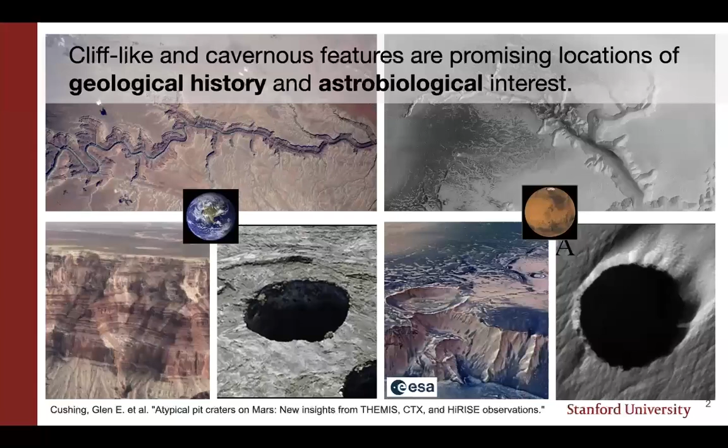In particular, these are lava tubes. It's hypothesized that if we want to see signs of past life, inside a lava tube might be a very good place to do it. They're relatively shielded from radiation, shielded from extremes in temperature, and better at preserving the remains of life.

Also, it's been pointed out that—yeah, this has been happening. I think it will come back on again in a sec. I'm not sure why.

There we go. If we will eventually have any human habitation, inside a lava tube is a great place to try to do it. Once again, because you're relatively shielded from radiation, you have a more stable thermal environment. So if you erect a structure, inside a lava tube is a place of great interest.

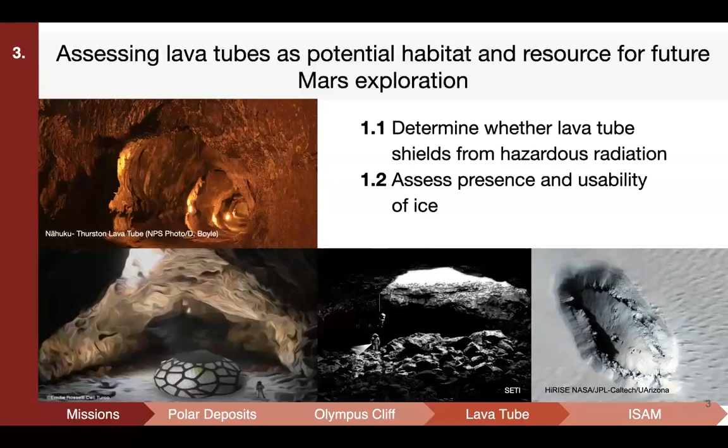Okay, so that's the motivation. Now, the problem with lava tubes is that they look like this—this is one in the Mojave Desert. We don't know for sure whether the lava tubes on Mars have the same kind of very rough, rocky terrain, but we suspect they do.

And then the question is, well, before any kind of people go into these places, we're going to need robots to explore them, to set up a bit of infrastructure. What kind of robot is suitable for this terrain?

The Ingenuity flyer on Mars was amazing, amazing what it can do, but flying inside a lava tube is another matter. Also, especially in that incredibly thin atmosphere, you can't apply any force, so it's hard to do any work.

Legged locomotion in this kind of terrain is difficult for people, and I think also for ANYmal and other quadrupeds. And not only that, but you don't just want to clamber over the ground—you want to be able to look at the walls and ceiling, because that's where it's likely that you're going to find some interesting chemicals and evidence of past life.

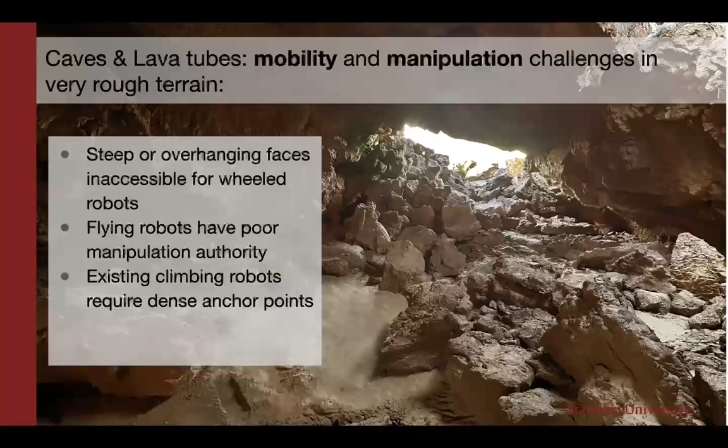So there have been climbing robots worked on at JPL by some of my former students. This is one with Aaron Parness called Lemur. This is Lemur 3, I think, using microspines to climb a cliff face.

The problem is that if you have a robot of reasonable size that you could fly up to the moon or to Mars, it isn't all that big. So the world becomes full of very large obstacles that you have to navigate around and clamber over. One way to work better in rough terrain is to make the whole robot bigger—the bigger you are, the smaller the obstacles seem. Unfortunately, it doesn't scale well with payload. Your weight grows rapidly, and the whole cost of the mission becomes large.

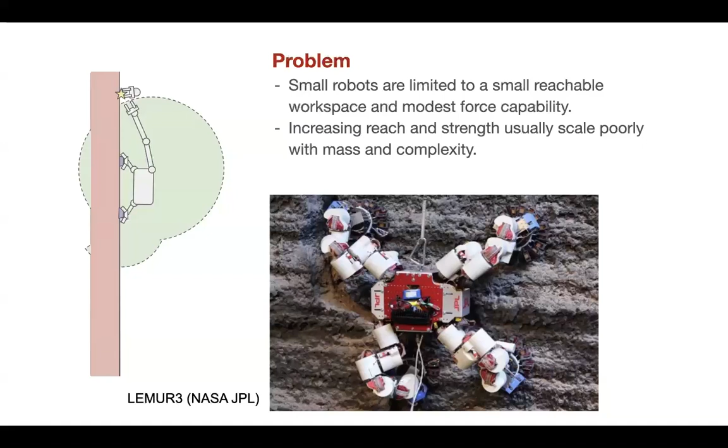So our idea was, what if you could have a small robot, something the size of a carry-on luggage suitcase, but with really long reach? Imagine a suitcase-sized robot where I could reach up to that projector up there.

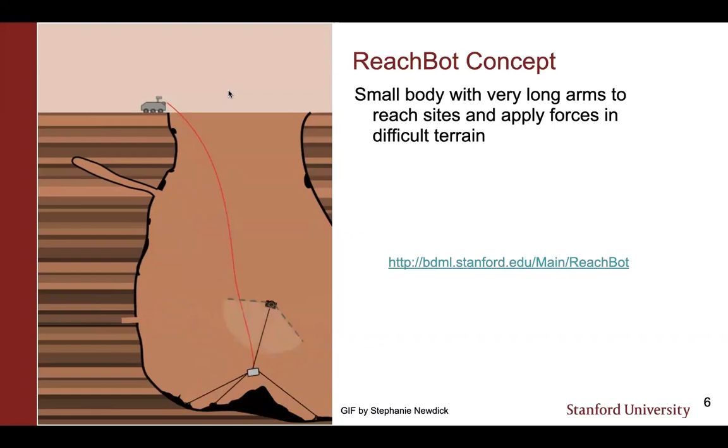The best concept, the best illustration of the idea, is from this GIF by Stephanie Newdick. So I'll just play it, and you get the idea right away. Now it's making its way down to the lava tube floor, which, remember, is very rough. And I think it concludes by taking a selfie. Yes, there we go. So that is the basic idea.

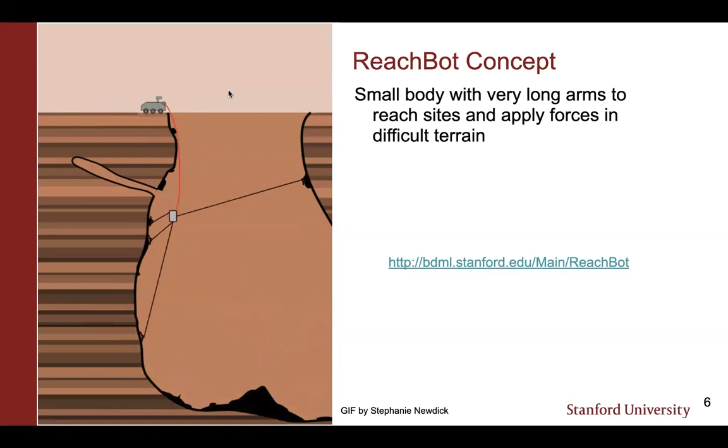I'm a bioinspired robot guy, so this presents a bit of a paradox. I like to think about bioinspired design, but why should bioinspired design be at all useful for space robots? There are, as far as we know, no biological creatures in space, so why would anything they've acquired from evolution on Earth be relevant? Good point. Nonetheless, it's hard not to think about it.

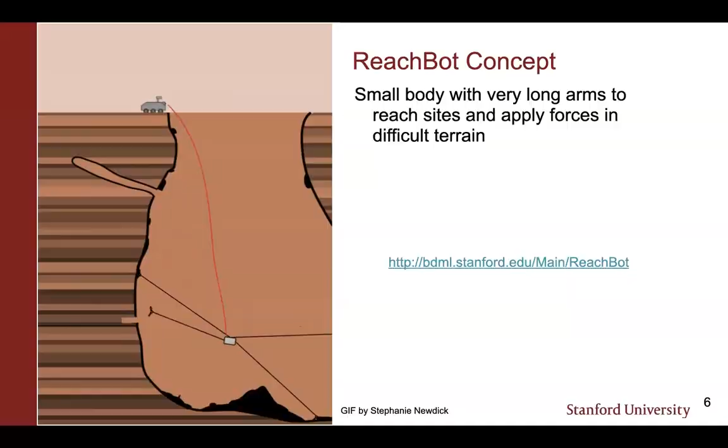The idea of having a small robot with very long limbs—the first place you might ask is, are there in fact creatures on Earth like this? So there are these insects, the harvestmen, where you have a very small body and very long limbs. This allows them to work very well in extremely complex, three-dimensional terrain.

But as you think about it, these are all very small on Earth, and the limbs are really not strong—they're not able to apply large forces. It doesn't seem to scale well. We don't have anything with this morphology at the kind of scale that I'm talking about.

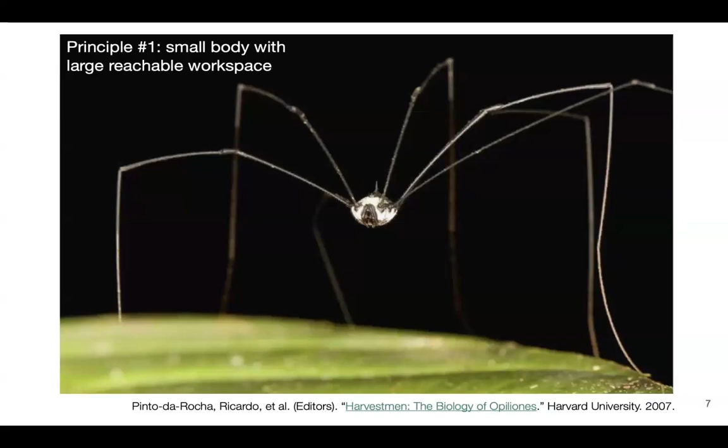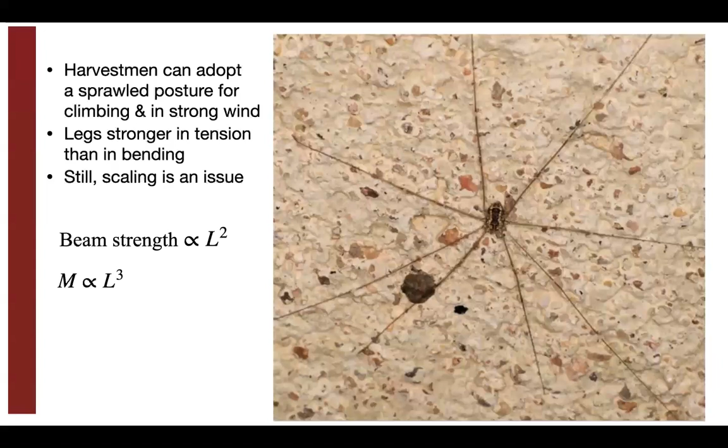So think about that. The other point is that the limbs in bending are not strong. However, it's interesting—what these insects actually do is, if there's going to be a thunderstorm, they spread out. These limbs are much stronger in tension than in bending, so they do this spread-eagled posture and are able to ride out the storm. But it doesn't scale well—beam strength goes as length squared, mass goes as length cubed, and that presents some problems.

Then again, if gravity is not an issue, maybe you could scale to the kind of scale we're talking about. So this is the Japanese spider crab, actually getting to be about the size of the ReachBot prototype that we built. But also notice—because I'll come back to this later—what's at the end of the limb there? You see the gripper, yeah.

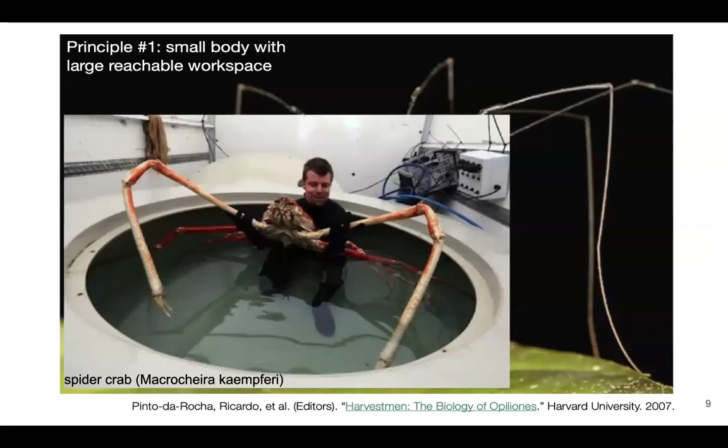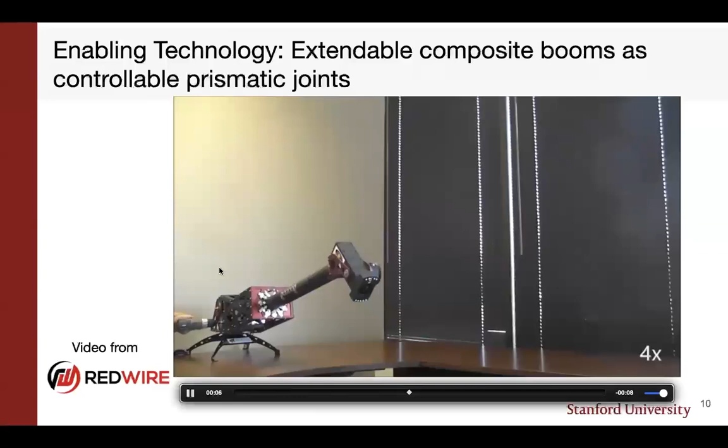So I could make jointed limbs, but it gets kind of long and complicated—we're talking about a robot with many degrees of freedom. If I say, look, what I really want is a very long reach, what's the simplest possible structure I could use to do that? There I can take advantage of these unrolling boom structures that are used for antennas and solar sails and things like that in space.

This is a carbon fiber boom. You can imagine it's like a tape measure—it rolls up and you extend it out. There are different kinds with different weight and strength ratios, but that's what we're using to make the limbs.

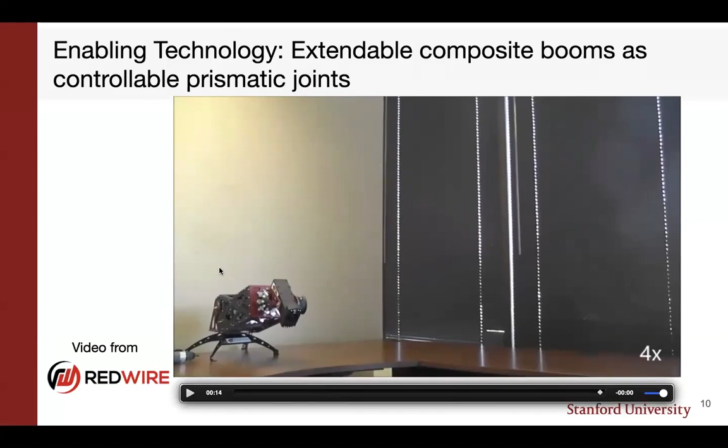Part of what attracted me to this whole concept at the beginning is that it allows me to bring back grasping, which is something I've been interested in for 35 years. If you have a small robot with multiple long limbs, you basically turn locomotion into a grasping problem. There's a whole big long body of theory about grasping.

You have multiple fingers, each one is a serial chain. Together they work in parallel. They apply forces to a body. You can talk about metrics of grasp stability. You can use it for control.

And remember what's interesting about these fingers is that they can push upon the object, but they can't pull. So there's an interesting unilateral force constraint.

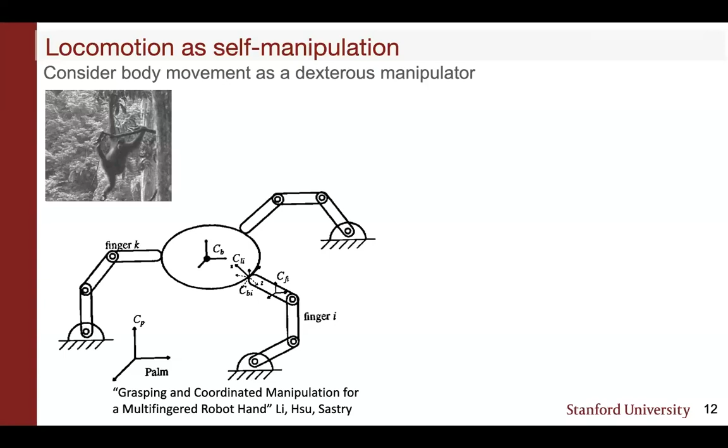We have basically the same kind of thing, only now, because these booms are very long, they can apply much more force in tension than they can in compression or bending. So to a first approximation, we have sort of inverse fingers that can pull but not push, and a lot of the mathematics of grasping carries right over.

What we really have is that at each of these booms, it has one long prismatic degree of freedom, then it has 2 rotary degrees of freedom at the base, and then 3 passive degrees of freedom out at the tip.

And the one part that's a bit different is the constraints at the end. In grasp theory, we talk about how fingers push upon an object, but the force you apply is subject to the constraint of Coulomb friction. So the force vector should be inside the friction cone. Here, the contact constraints are somewhat different, and I'm going to spend the next few slides going into that in a little more detail.

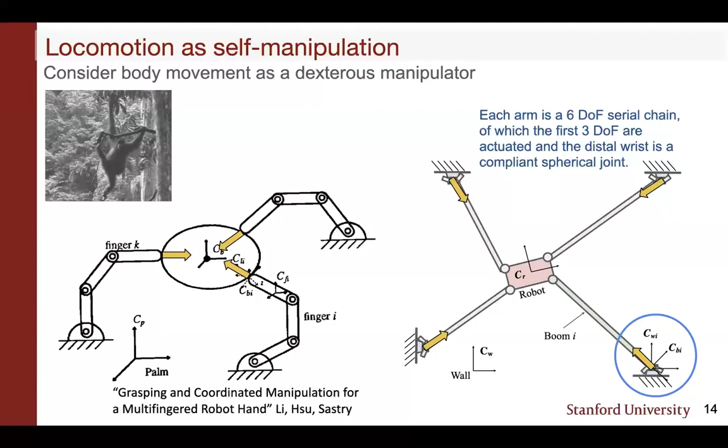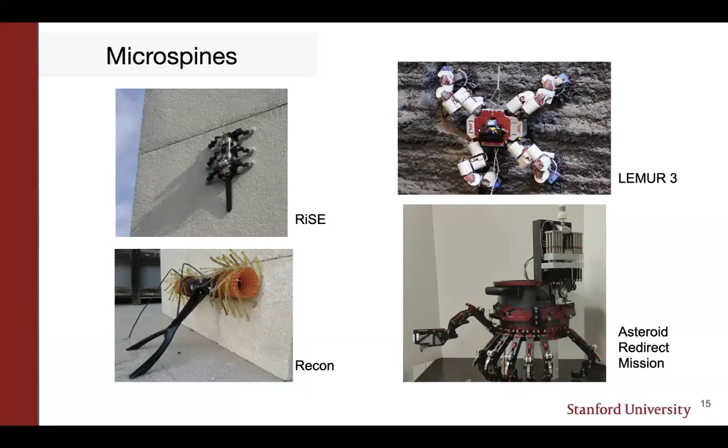For grasping rock, our solution, of course, is to use microspines. We love microspines, we've used them for over 20 years. We've used them with Boston Dynamics on the RiSE robot, we use them with JPL on Lemur, and so on. So I need to give you a quick crash course on spines.

The spines are literally sharp little things, we've used various materials. We've used suture needles, we've used various kinds. Actually our favorite thing nowadays is to use Japanese microfish hooks. I think it's wonderful that Japan, the country that has bonsai, also has a hobby of microfishing, and they make really good microfish hooks. So we clip those and put them into our spine suspensions, and each spine, if you looked at it with a microscope, has about a 10 micrometer tip radius.

It interacts with the rock surface, and depending upon how rough the surface is, you have a certain probability of finding what we call an asperity, which is a little bump or a pit within a certain unit of area.

Having latched onto an asperity, how much force I can apply and in what direction is a function of the local angle of inclination, my approach direction, and the local coefficient of friction. So if I have some probability distribution describing the surface roughness and how many features there are of a certain angle per unit area, I can make a probabilistic prediction about forces that spine can apply, but it is stochastic.

And then if I have many spines, I can add that up, only if I assume the spines are independent. We'll come back to that later, because that leads to a whole problem of spine suspension design: when you have 5 spines, do you really get something approaching 5 times more force than just 1 spine? It's a big practical design consideration.

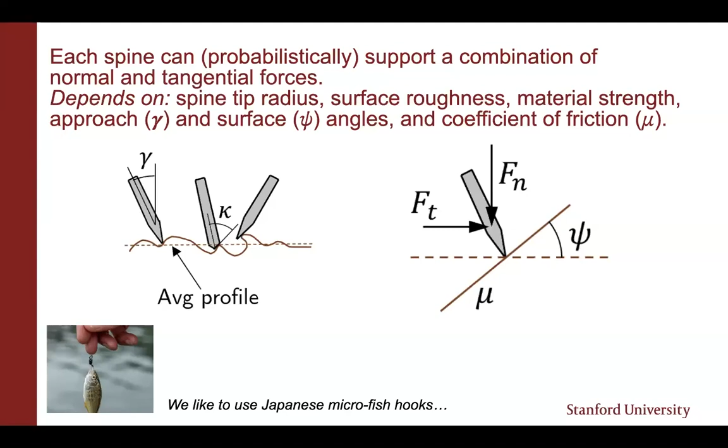So spine theory, up on the left, the models actually work very well. They're able to predict mean spine forces very well, but it is stochastic, there's a fair amount of inherent variability. It's like saying there's a 70% chance that it will rain tomorrow. And we use that to think about the grasp.

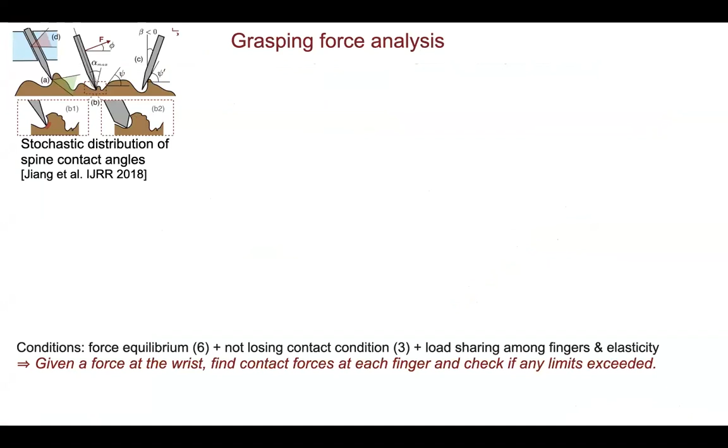So we have a gripper in the current version of RISE. It's a 3-fingered gripper. It doesn't have to be 3, but 3 actually works pretty well. And what I'm doing is solving for the quality of the grasp.

So I have force equilibrium equations. I have, in addition, it's a little bit conservative, but I also want to be sure that when I pull on the gripper, all the fingers remain in contact, that one of them doesn't pop off. It actually could possibly still hold with 2, but then I have less stability. So we enforce that constraint as well. And then I want to have load sharing among the fingers.

And if I do that, I get a set of equations that I can solve such that given some force applied to my compliant wrist, I can predict what the force will be at each finger, and then I can ask whether the force at each finger should be sustained by the collection of spines on that finger. Does that make sense? So we're almost done with grasp theory here. I'm just going to stop and take any questions before moving on.

Question: the arrangements of how the spines on each individual finger? Yeah, I will talk about that a little bit in the next couple of slides. How many spines and where they should be. Yeah.

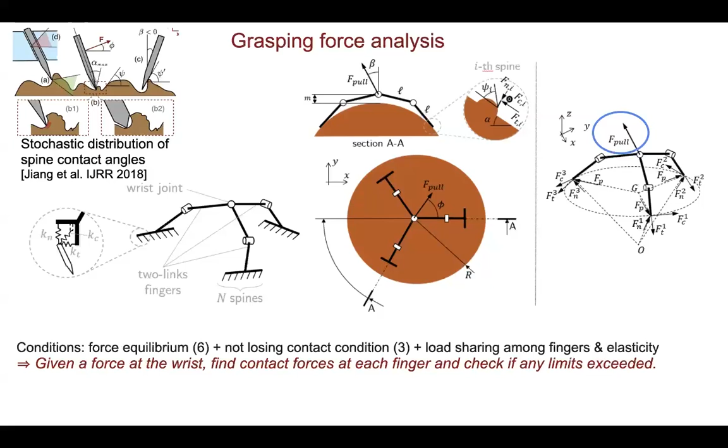Take one, okay. So we apply a pull force. What we're eventually going to do is build the analog - remember, with grasping, forces have to be within the Coulomb friction cone. I need to build an analog to that. It's called a limit surface. In general it could have up to 6 degrees of freedom. It's a convex surface, and the way we do it is like this.

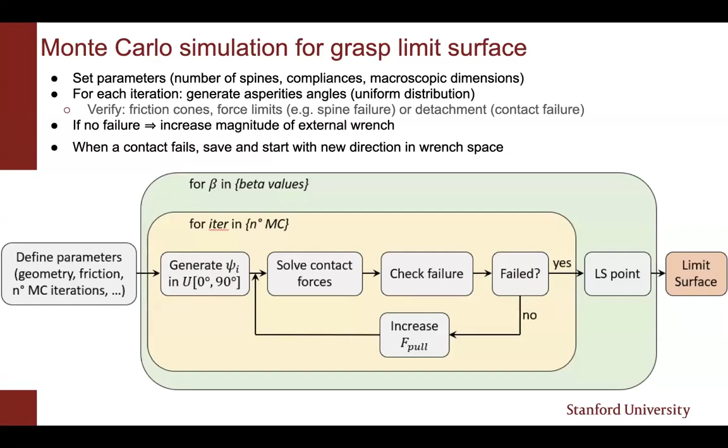We assume a grasp, and then we apply forces at the wrist. We solve the grasp equations, get the forces at each finger, and check whether all the fingers have forces that they, in theory, can sustain. If they can, we increase the force a little more until one of them can't. As soon as I get a failure, I record 1 point. We do that as a Monte Carlo simulation, and thereby gradually build up a limit surface.

Because I've assumed a compliant wrist with no torques, if I embed a coordinate system there, I can plot a 3-dimensional limit surface, with forces in X, Y and Z. It's a convex surface, and if you take a cross section of it, it looks like what we see on the left here. Remember, it was stochastic, so I have my predicted mean, which is in blue, and then 1 standard deviation in red. The idea is that if I apply a force, I want that force to be inside this limit surface.

If it is, then in theory I should be able to sustain that grasp. I'm going to use that information for planning later, and if I'm conservative, maybe I'll use the lower red boundary. You might be asking, what are these funny flat faces here on the sides, which you can see as flat facets? Remember I said earlier that I was imposing the constraint that when I pull, none of the fingers should pop off and leave me with just two. So that's what makes those facets. Does that make sense?

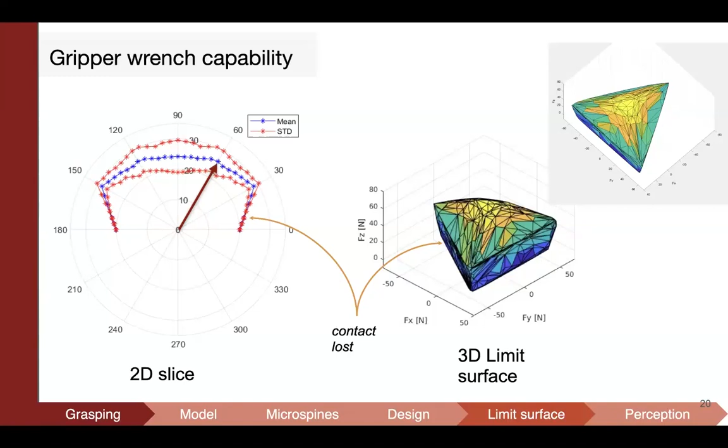So we build this limit surface, and it already begins to tell us some things. We're going to use it for motion planning, for grasp planning. It also gives us some insights into gripper design.

Well, there's another cross-section that I've plotted. As you can see, not too surprisingly, if I increase my internal grasp force on the gripper, then my maximum pull force increases almost essentially linearly.

Well, suppose I want to sustain a large force, and I really, with my gripper, because I'm very much weight limited, I have this long arm that I'm putting all the way out. I'd like the gripper to be very lightweight, as low inertia as possible, and therefore I'm going to use small motors and so on. So suppose I can't actually afford to exert 12 newtons worth of internal grasp force, and yet I still want a really strong grasp. What could I do?

Well, more spines. Remember, if I have enough spines, I can hang my own weight from it, provided I maintain independence. And in fact, with our current spine suspension, what you see is this: as I go from, on one finger, from say 10 to 20 spines, I'm getting a substantial increase in my pull force. As I go to a higher number of spines, I start getting diminishing returns. In fact, 50 is really not much better than 40. And that's because it's actually pretty hard to have increasing numbers of spines and still have them all be completely independent of each other.

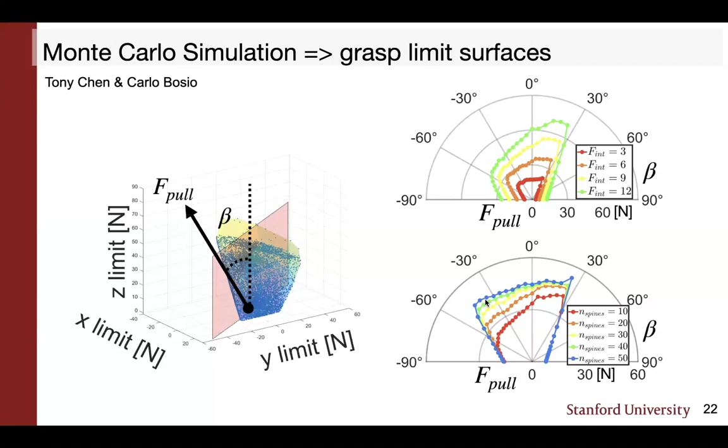A couple of other things that you learn. One is, it really helps. This is very different from when we were doing climbing walls. Here we have the option to look for features that we think are kind of graspable. And that makes, again, a big difference.

So this angle alpha essentially is related to how much I'm able to enclose a part of the surface. The worst case, which is a flat wall, is this light blue line down at the bottom. What I'm plotting here is the ratio of pull force, maximum load force that I can apply, to my internal grasp force. As you can see, as I increase the grasp force, the pull force just increases directly, I don't get very much extra. On the other hand, if I'm able to get to wrap around surfaces a little bit, I can get much, much larger ratios of pull force. Although again, eventually it doesn't help anymore.

So if I can wrap my fingers partly around a knob-shaped object, that helps a great deal. But if I am to the point where they're just opposed to each other, it isn't really much better, which again kind of makes sense intuitively.

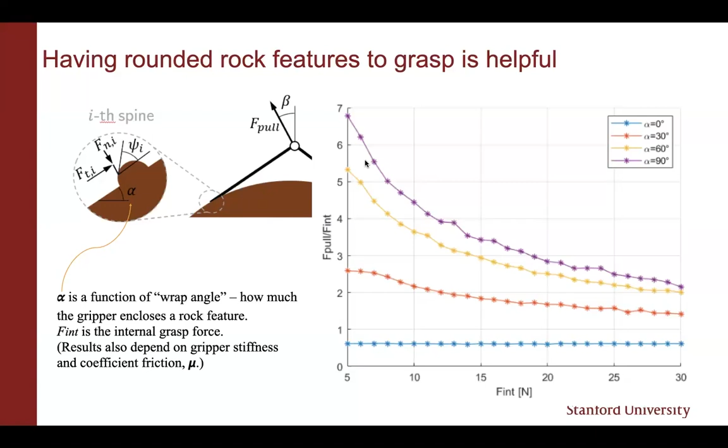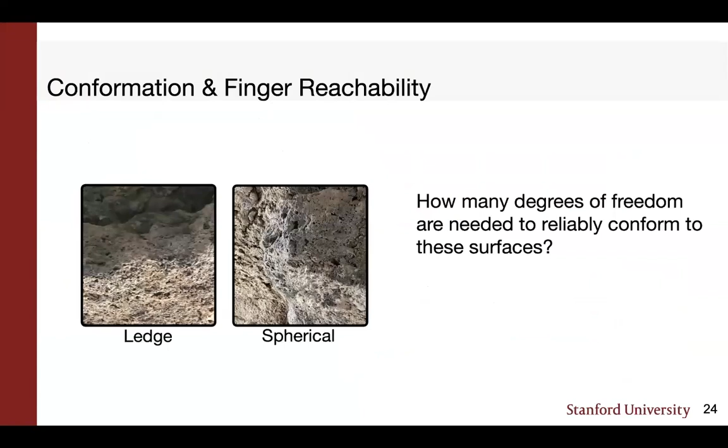And finally, if I'm going to wrap around these features, what kind of finger design should I have? How many phalanges should my fingers have? How many degrees of freedom should they have? This is a problem of conformation.

So what we're trying to do is conform to the surface at multiple length scales. At the microspine level, I want to make sure that all of my microspines, even on a very rough surface, are still able to reach the surface and find asperities and sustain some load. I want the finger to conform to the surface at its length scale, and then I want the whole gripper to be able to conform to surfaces.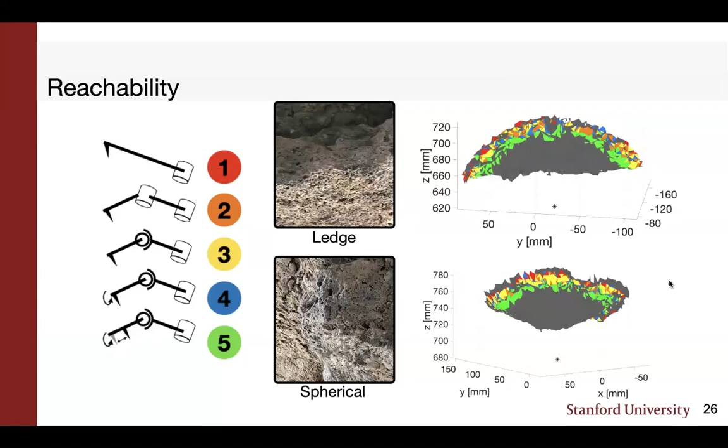So here's the gripper, and this is especially Tony Chen's design. It is an under-actuated gripper. It is just meant to grasp, it doesn't manipulate. I assume it will come back in a minute.

There we go. It's a 3-fingered gripper. Everything is driven by one tiny motor and a huge gear ratio. Honestly, I kind of think in retrospect that Tony could have afforded a slightly bigger motor, but what it mostly does is it makes the hand very slow to close. There are tendons routed through these fingers, and a differential that does load sharing between the fingers. And then here are the spine tiles, and I'll say a little bit more about them in the next slide or so.

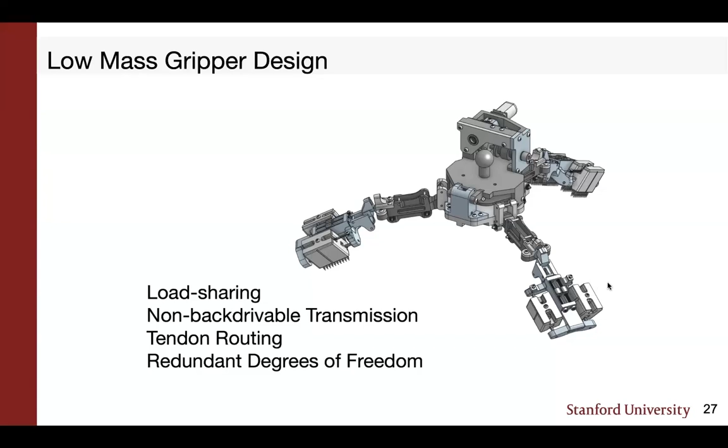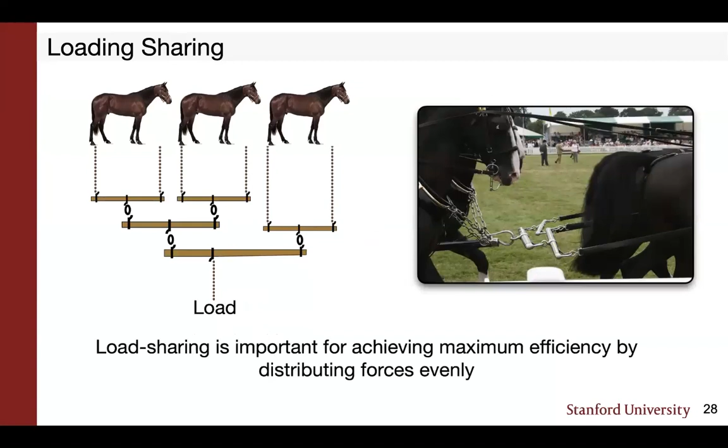So one way to do load sharing is to use a differential. It's a very old idea going back to Roman, maybe even pre-Roman times. If you have several horses or oxen pulling a heavy load, you don't want the one that gets a little bit ahead of the others to wind up taking all the force. So you set up one of these kind of differentials, and we do that too.

So here is the design, and I'll spend just a moment or two going through some of the features here. It's a busy slide. The differential is up in the upper right corner here. So the motor is pulling on that and loading the 3 fingers through the differential. The spines down at the tip, these are what we call the linear spine array.

So there's a bit of history there. When we started working on spines and understood the need that every spine should be able to load independently of its neighbors, we actually made a compliant 2-material suspension for every spine. When you look at things like the Rise robot or early stuff, that works, it's actually great, but it leads to a kind of large apparatus. The one where there's a photograph of me hanging on a wall, the spine array is as large as a tennis racket. What we discovered is that if we do spines that slide linearly, we can get a much denser array. They do not do load sharing as well, but they more than make up for it in terms of higher spine density. So if I want to do kilograms, tens of kilograms, or maybe hundreds of kilograms, we mostly have been using these linear spine arrays now.

And then we have tendon routing with compliance. You were asking about compliance, Robert. Yes, there's compliance everywhere in this system, because what I want the hand to do is that if I just push it at the end of my long boom, which is extending, it should just adapt to whatever that surface is in a compliant way, and then I tighten the motor to get a good grip. And that's how it works.

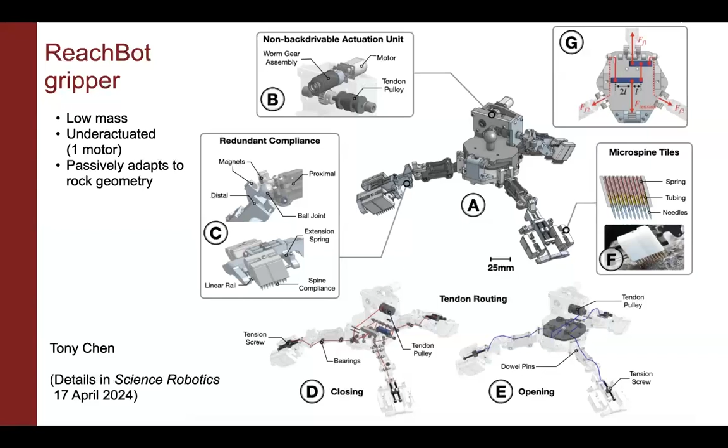I want to move on now and talk about a couple other parts of the problem. This is Julia's work especially. There's an interesting perception problem. In contrast to what we did with earlier climbing robots, like the Rise robot, where I'm just climbing a more or less featureless wall, here I'm relying on finding features in my vicinity that look like they would be good to hold on to, like that cornice up there.

So there's a kind of two-stage perception problem. One is before you send an arm out, you're looking around with cameras on the body to see if you can identify crevices or knobs that look like they would be good to hold on to. Then as you extend the arm out and get within a meter from the surface, now we can look at it in much more detail, see if it's really as rough as I was hoping it was, and if there's really a good place to find on the local surface.

So she's using nothing special here, it's an Intel RealSense camera and time of flight also, identifying spaces where we think there's interesting curvature at the length scale of the gripper in order to take a grasp. And remember, from a few slides ago, I showed that plot of wrap angle versus pull versus internal force. That's what I'm looking for—I'm looking for things where I think I'm going to be up here in this regime and not down here.

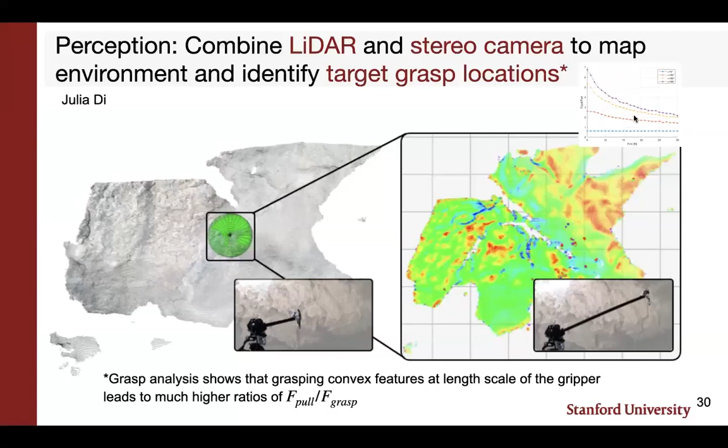As you get closer, of course, you can see a lot more. That's a great graspable feature there. Use that to do your final grasp planning.

So it was spring of 2023. Tony, Julia, and Stephanie took a field trip to the Mojave Desert. The geologists told us that that was probably the best analog on Earth for the kind of lava tubes that we would hope eventually to explore on Mars.

And we didn't have a full-on ReachBot robot at that time. We had one arm on a tripod. I'll show a little bit of the video. This video, I think, is included as part of the media for the Science Robotics paper that describes this work. As you can see, it's not fast.

And we find a grasp, and then the gripper very slowly closes and tightens. So we did targeting practice, we did pull force tests, and so on.

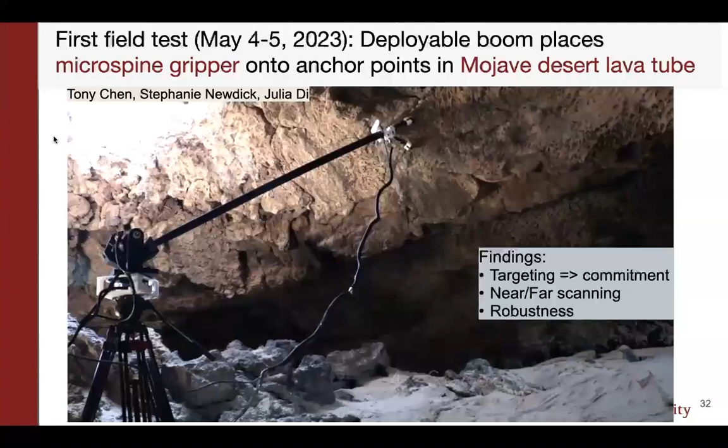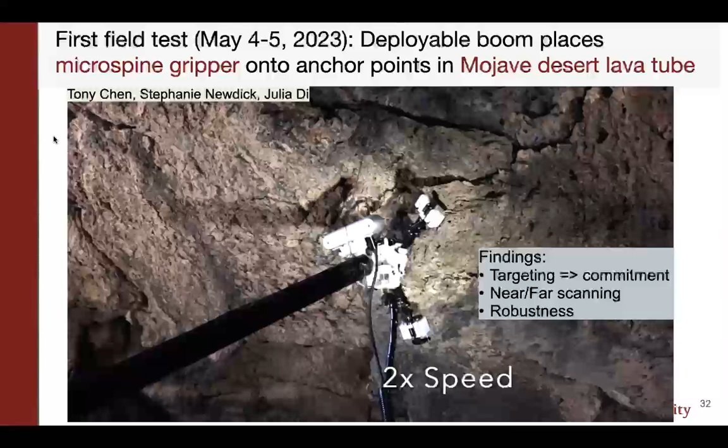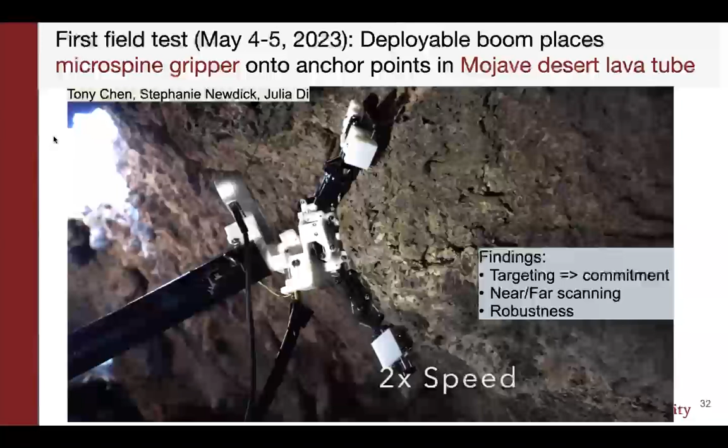And actually, we learned something from this. Even if things get faster, grasping at the end of a long boom is really pretty different from a robot grasping things on a tabletop. There's a level of commitment involved. It's not as severe as it would be for a drone perching, where you fly and you try to find a good perching spot, and either you land and grasp, or else you fall and you have to very hastily try to recover before you hit the ground and crash.

You don't have that, but it takes a while to load these arms all the way out, and then you don't have very good targeting. In fact, we have to use endpoint sensing. We don't have very good control at the end of that very long arm. And so at that point, I've made a certain commitment that I really think that there ought to be something good to grasp out there.

As I mentioned, we have both near and far scanning. And then, yeah, robustness, of course, is always an issue whenever you're doing anything in the field.

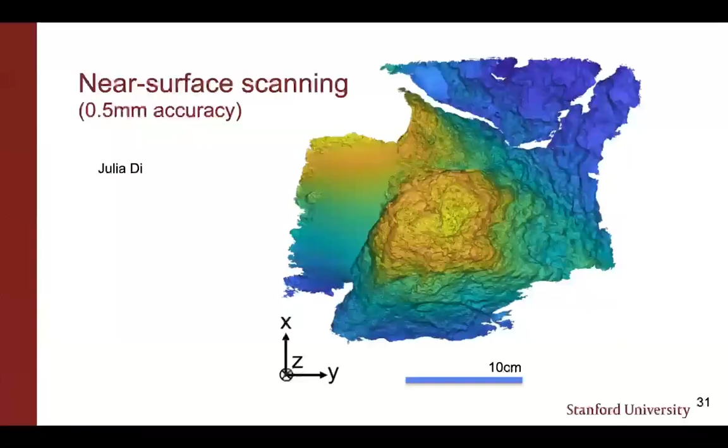The one hanging down from the camera, or the very thin one going upward? Gravity compensation, because this thing's, Martian gravity is less than Earth. Yeah, so it's gravity offload.

I think say that for a rock climbing competition in such a case, would it make sense for me to try? You would give this to the professional rock climber, give them finger caps with these needle surfaces. What would they be able to excel with? It's funny, we did talk to some rock climbers. I mean, it is of use, because you can grasp with spines much faster than you can insert screws or things like that. So from that point of view, it should be good. And you can apply really large forces if the rock quality is good.

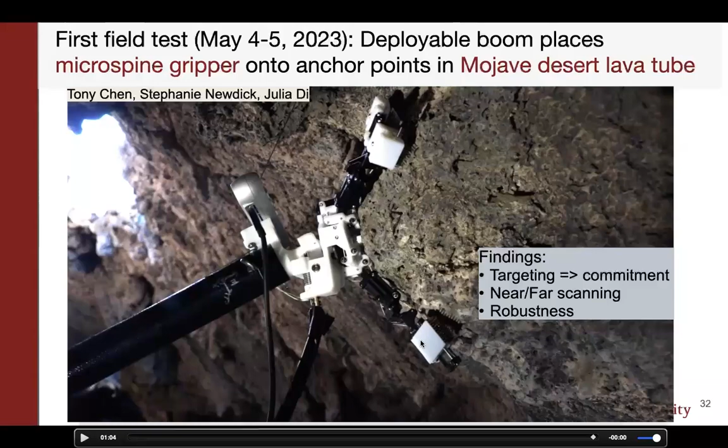So there's the concept. Now I want to talk a little bit about some of the planning work of Marco's students, in particular Stephanie. So there you are in your lava tube. One of the good things is that there's lots of handholds. And so now we're doing this kind of motion planning problem where I want to get from point A to point B, and I do that, I need to find a sequence of, it's basically stances.

So we're doing a rather slow crawl where we move one arm at a time. And then within the constraints imposed by my kinematics and my limit surfaces, I can move the body a certain amount. And then I have to reposition an arm, and I just keep going. So that's how we move. And there have been a couple of papers on the motion planning problem here, but that's the gist of it.

There's actually lots of handholds, and you want to get efficiently from one location to another, moving one boom at a time, subject to constraints. There's the grasp force constraint. There's a couple other things we learned. You want to keep all the booms in tension all the time. If you do that, the grasp is stiffer. And finally, you also want a stance that is resistant to perturbations.

If there's a finite chance that a grasp will fail, then when it suddenly fails, the force becomes a step function on that arm, dropping from something to zero. Depending on how the other limbs are arranged, that could be catastrophic - I could fall, or undergo large oscillations that cause other grasps to fail. So part of stance planning is adopting a conservative stance, such that a failure on any one boom isn't going to cause a big problem.

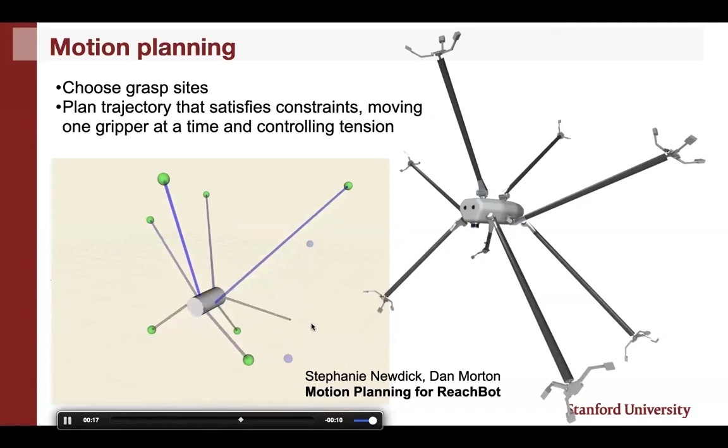We presented this to NASA, and they said it's all very cool, but it seems kind of complicated and maybe expensive and heavy. Could you get away with fewer booms? And we said, yeah, let's think about that.

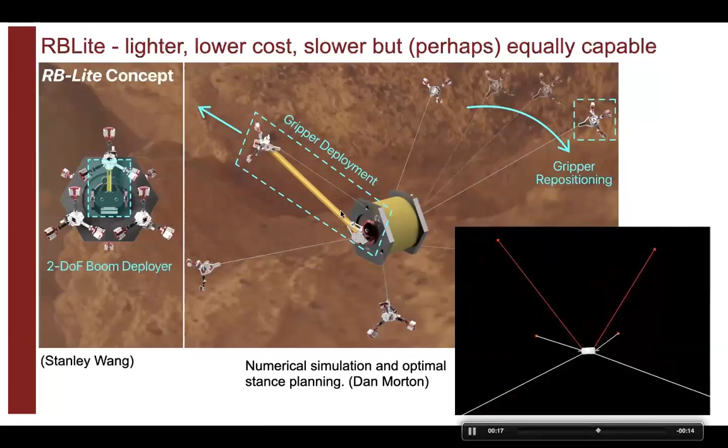Stanley was a new student at Stanford. I challenged him on arrival to think about the absolute minimum number of booms - how about one boom? Then it becomes a cable-stayed robot: a single boom deploys a gripper, leaves it there, then comes back paying out a cable, so now you have a robot suspended by cables. It's very slow, but in theory you can do pretty much everything the original ReachBot idea could do. It turns out there are some trade-offs though, and this is new work with Dan Morton, who's working with Marco.

It has to do with how sensitive you are to suboptimal grasp choice.

On the left I have a bunch of cables on the body of a robot, and on the right also a bunch of cables, but in a more crossed configuration. What I'm plotting here is essentially a polytope corresponding to the quality of this cable-stayed grasp - similar to the Ferrari-Canny grasp algorithm for those familiar with it. The larger these polytopes are, the better, and I've plotted it as a projection in three dimensions. The cable configuration on the left is noticeably slimmer - the ability to apply an arbitrary wrench and sustain it isn't as good as on the right. For the more optimal configuration, the cables are nearly as good. So one of the main things we learned is that you could do a mixture of booms and cables, but the more you're suspended by cables, the more sensitive you are to a poorly chosen grasp.

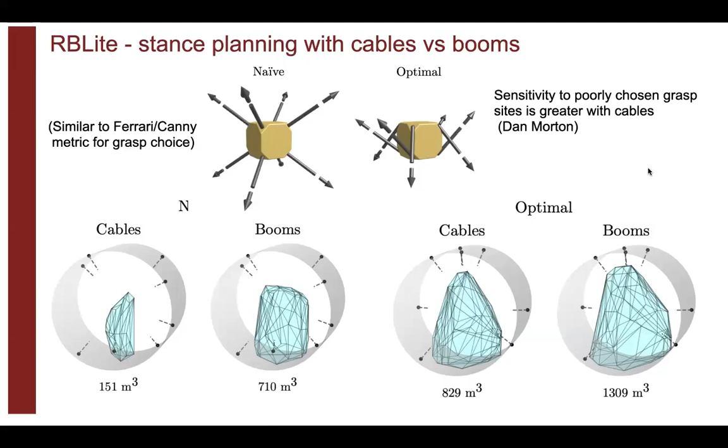As I thought about that, we've seen this kind of issue before. Where have we seen the difference between the picture on the left and the picture on the right? You see it every day. What's the difference - why is the one on the left worse, and what in particular is better about the one on the right? Let's think about the physical intuition here.

I have an assignment for all the students, a short one. On the way out from this seminar, take a hard look at the first bike rack you find, and look at the wheels on the bicycles - the difference in particular between the front wheel and the back wheel. If you really want to apply torque, as you often do on the rear wheel especially of a mountain bike, they always have these much more interlaced, crossed arrangements of spokes, because it allows you to apply more torque. The front wheel, in extreme cases, can be like the one on the left here. That's exactly what you're seeing between those two pictures in the upper right corner. Does that make sense?

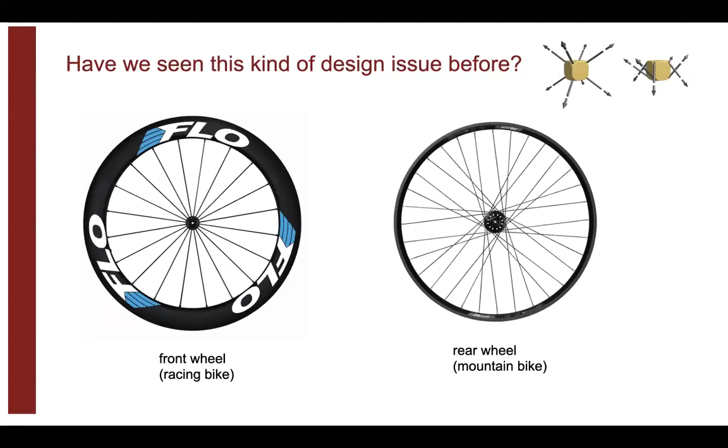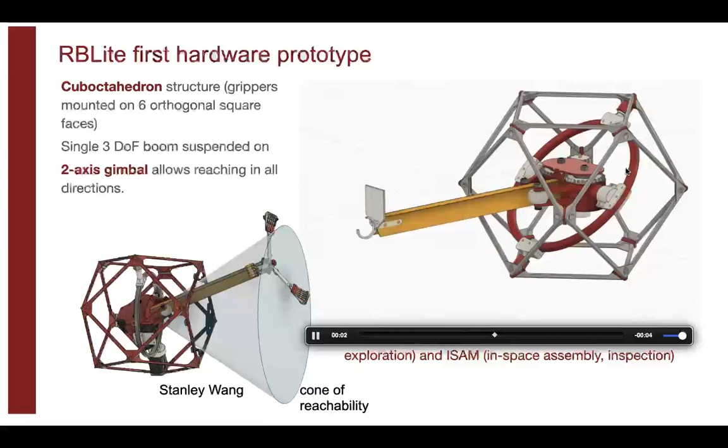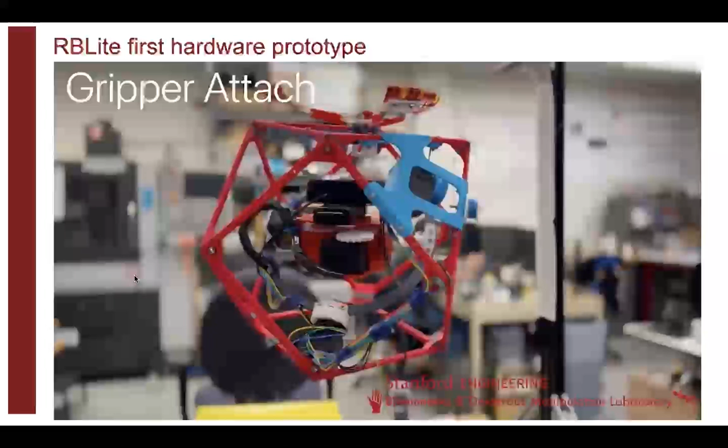Amazingly, over Christmas, Stanley decided to build a prototype of this one-armed bandit ReachBot idea. It has a 2 degree of freedom gimbal, and the boom itself is literally just two carpenter's tape measures back to back, unspooling. It can rotate into one of the different facets of the structure and grab a gripper. I'll show you a bit of the prototype here - this is mainly a proof of concept. In the end, I don't actually think this is the direction; unless we're really on a tight weight budget, I'm not sure this will be my favorite design, because it's quite slow.

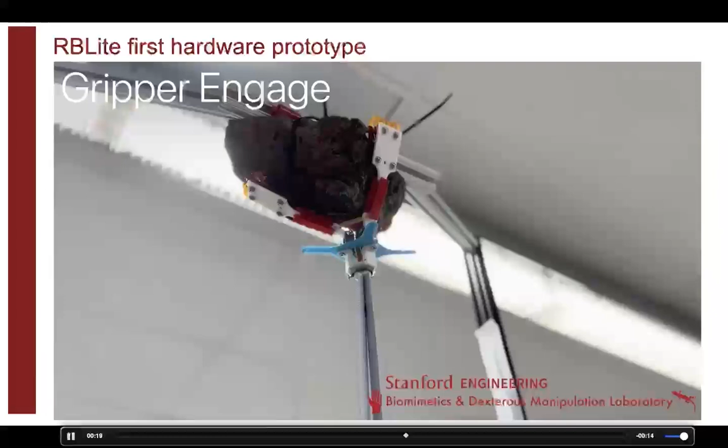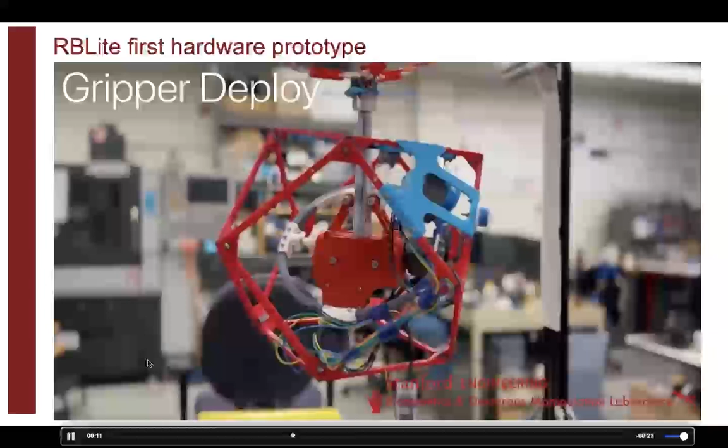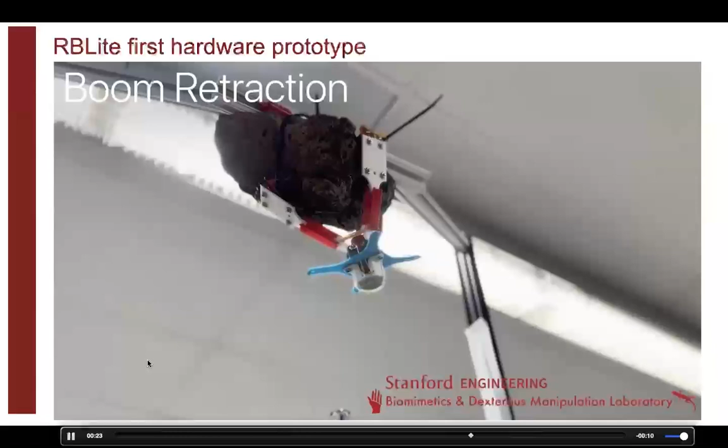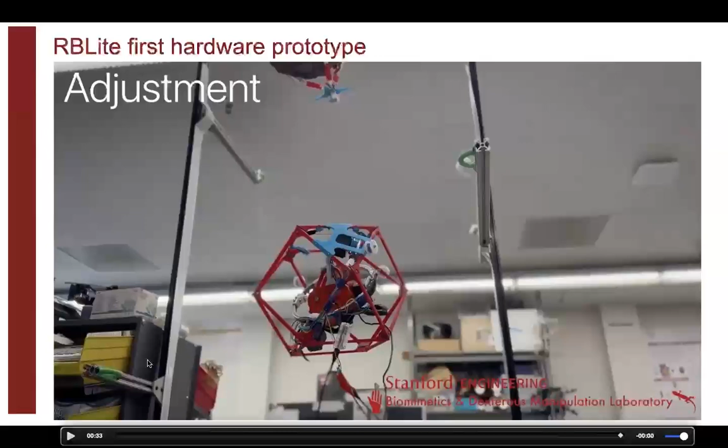Let me back up. So what did you see happen here? It came to life, it pivots, and it's going to attach using a magnet, the gripper. Then it's pushing the gripper out, and the gripper grabs onto a conveniently placed piece of lava, then it separates and retracts - you can barely see it, but it leaves strings behind. Now it's a cable-stayed robot, at which point it can haul itself around within the confines of those cables, but it can always retract a gripper and put a new one somewhere else. So that's the basic idea.

In our current thinking, we're taking a sort of intermediate design. If you assume booms are very long and can only be loaded in tension, you ought to have 8, because you should have 6 plus 1. And since you need to reposition booms one at a time, you should have 1 more. On the other hand, if you can apply modest but non-negligible torques at the shoulder, and some compression in the boom, then I only need 3 plus 1. That's the design we built for the open house of the Stanford Robotics Center. You should all come to California and see the new Stanford Robotics Center, and if you do, you can play with this robot, which is set up there.

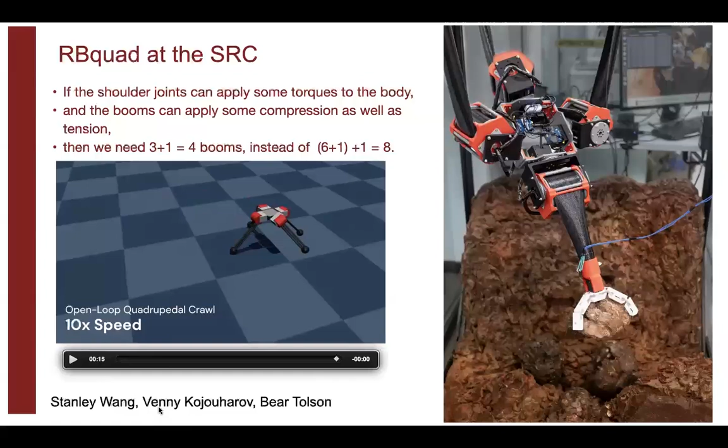We started looking at other things, like, wow, if these booms are really kind of sturdy, maybe you could do other stuff. Maybe we could even do some locomotion - like crawling along the floor of the lava tube to get to where you want to be before you start climbing. So these are things we're interested in right now. One of the new students working on this - some of you may know Venny - he was in our lab for a while.

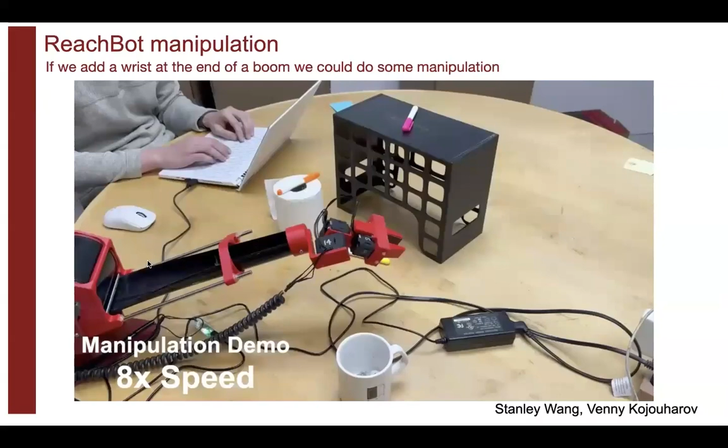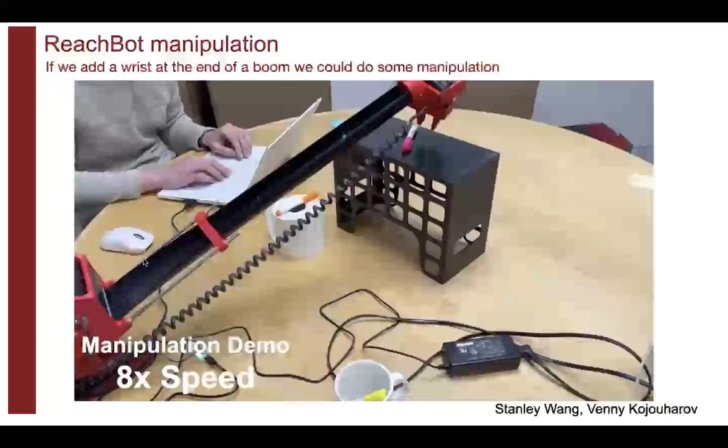Then you start thinking about other things, like if these booms are actually kind of sturdy, and if I haven't sent them way out there, maybe I could do some manipulation - at least a 2-axis wrist and a gripper. And that opens up new possibilities. So it's interesting - I think we're moving from the concept of locomotion as manipulation, which was very much the original idea, to mobile manipulation, but with very, very long arms.

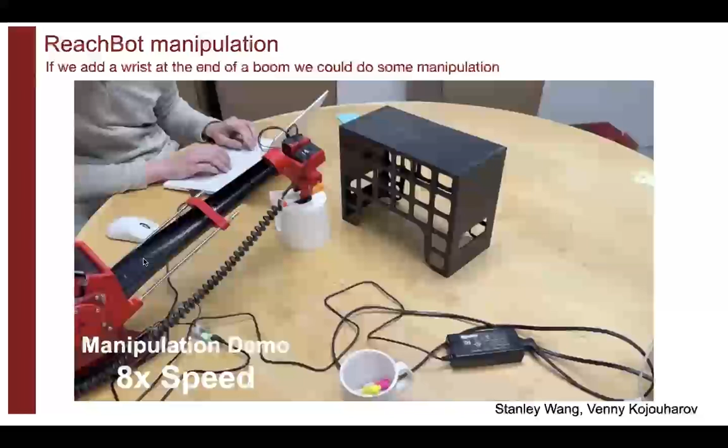If I get time, I'd like to propose to NSF a workshop on sort of interesting series parallel hybrid robots, which would include tensegrity robots, ReachBot, the sort of tetrahedral variations on the Vine robot, and a few other things that are out there, because they all have similar stance planning and motion planning characteristics.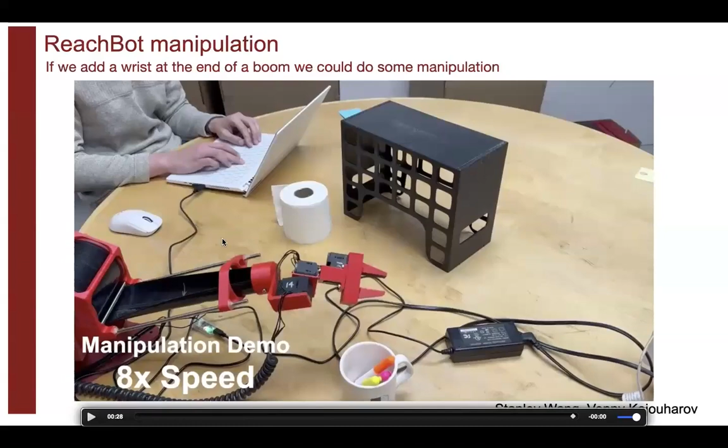Finally, we had some people from ANYmal visiting, and we have one of the ANYmal robots, although I'm sad to say it's dead at the moment - we'll get it fixed. What if you put a ReachBot arm on ANYmal? Is that possible? Sure. Actually, we have the dynamic simulation of ANYmal in MuJoCo, and it handles it better than I thought it would. This is unpublished - just hot off the press as of like a week ago.

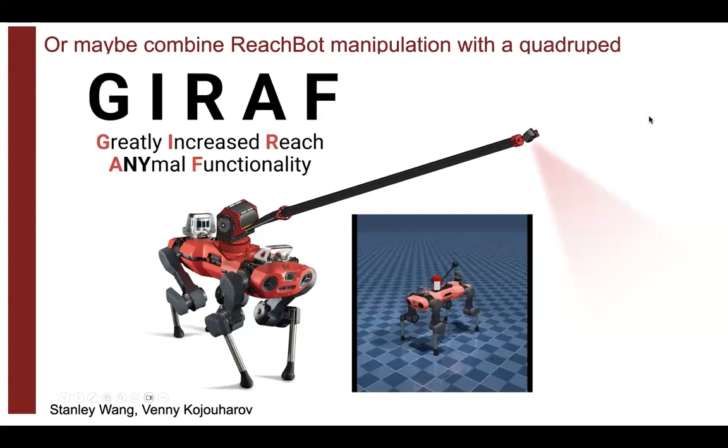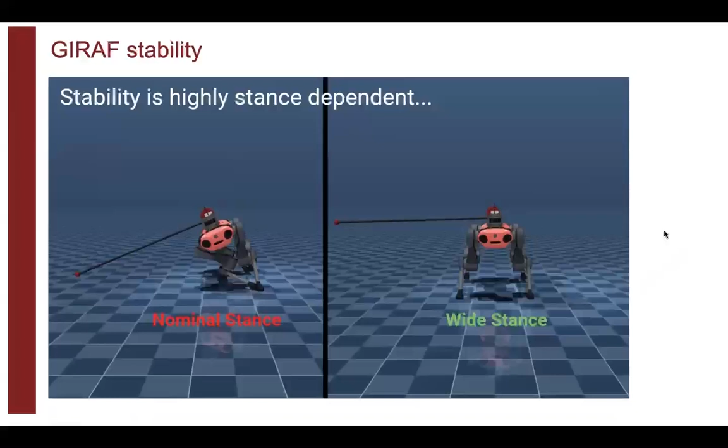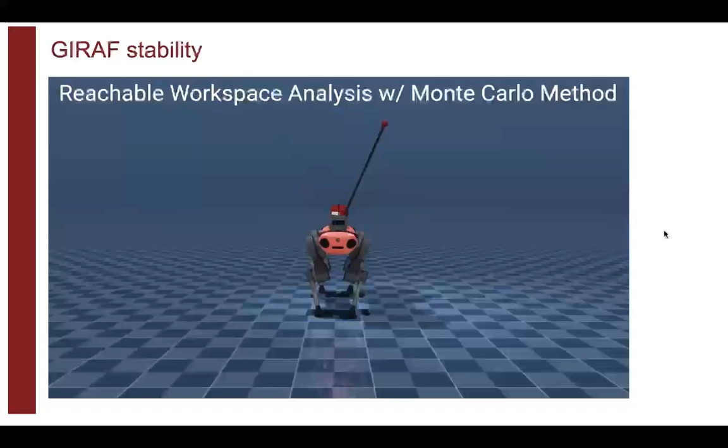Stanley and another student have been doing some simulation. ANYmal mostly walks with a fairly narrow stance, but it can take a wider stance, and if you do that, a boom with a 1 kilogram weight on the end is actually not as bad as I thought it would be. So we're doing these simulations right now, trying to make sure the numbers are correct. But yeah, so what could you do with this?

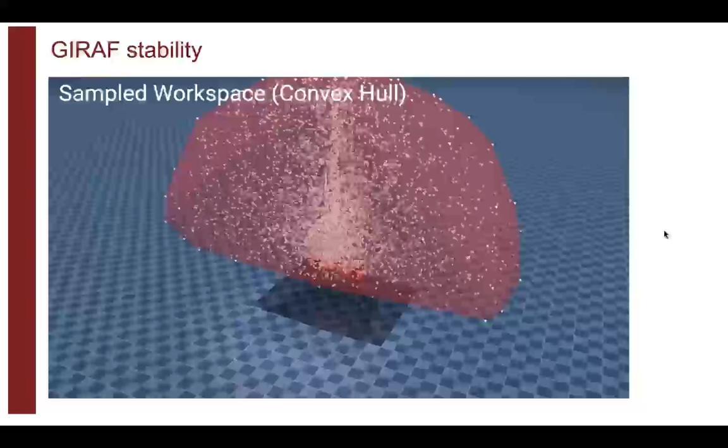We were talking to a guy, Paul Bingaman, who's involved with ANYmal, about locations for plant inspection where it would really be nice to have an ANYmal that can go around. And then, say I need to fix something on that projector up there - no problem, I just extend my long arm and I can look around and maybe grab something or unplug something or whatever. So that's the kind of application we're interested in.

You could balance, you could do dynamic balance. In fact, we were already asking, well, ANYMal has this huge battery, is there any reason I couldn't do like a construction crane and have the battery on the back? And we were told we would rather you didn't make that level of modification just yet. But yes, two arms might not be much worse than one if you were clever about it. And we're thinking about that as well. It's a good idea.

Oh, you could do other things. With two arms, I'm strong enough, maybe with my spines, that if ANYMal came to a large gap, like between here and the other side of the balcony over there, I could extend an arm up and swing. Who knows what you could do?

Yeah, okay, so that's where we are thinking right now. In part, because honestly we're not going to go to Mars anytime super soon, and if you've read about the latest cutbacks at NASA, 300 people laid off from JPL and so on. So the prospects for actually doing something with this technology are better for the commercial CLPS program. There was finally a successful lander on the moon from a company. We earlier used to joke that the killer app for ReachBot was going to be righting toppled landers, because there were two of them from previous attempts. So that's still there, although not super near term.

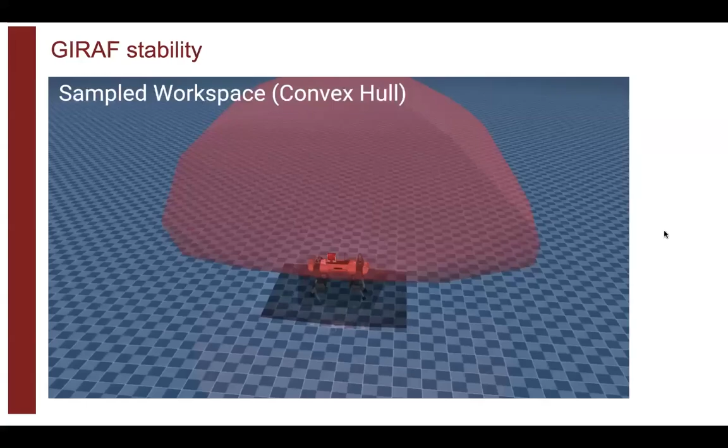And then what about terrestrial applications? Doing something with the combination of booms and ANYMal, I encourage you to think about that. All right, so that is it for me. Thank you very much, and I'll take final questions.

With ReachBot, we haven't tried, and I actually don't think we would be able to, because the gripper is not designed to be a good gripper for a flat wall. We're really banking on having a little bit of the alpha, the wrap angle, in order to get a high ratio of pull force to internal force.

General curvature of the wall, like in a closed cave, or could you also just climb down a flat wall? No, a cliff or something, yeah. As long as there are some features that have a radius of curvature that is kind of on the scale of the gripper, then it should work really well. So cliffs are also very much of interest. But for flat walls, we've done that - that was RISE. It's a different solution, because on the downside it's flat, which means internal forces are not as effective, but on the plus side there's no features, so every place you put a hand is just as good as anywhere else.

Very gecko inspired, right? The spines - well, there's a backstory there, it was a DARPA project. And you know how DARPA, like one year they want a dog and pony show, they want to see something exciting happening. And the gecko adhesives just were not ready at that time, so they said, well, we don't want catbot. And then Bob Full said, well, what about cockroaches? What if it's a giant insect? Insects, cockroaches, climb walls using spines. And so spines, we were able to get working at a practical level, carrying a 10-kilogram robot, much sooner than any of the gecko stuff. And it's interesting, in the end a lot of the principles are very similar - this paramount importance of load sharing, we found this with the gecko adhesives too. You can't just make the adhesive area bigger and bigger, or the maximum pressure goes way down. You have to do load sharing. And that was Elliot's work, finding ways to do that. So yeah, you're right.